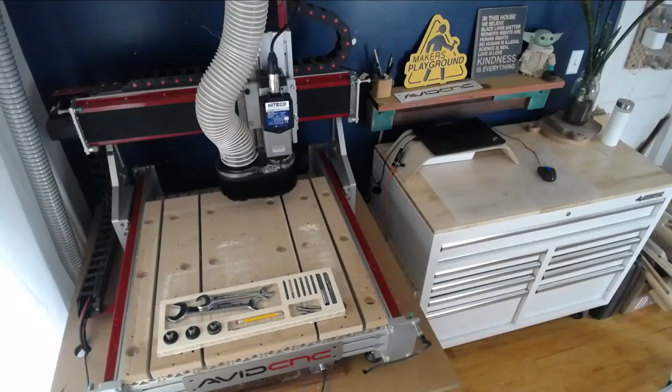Here is the tool tray. I had some scrap bamboo plywood. It's super simple, just 2D pockets. I can put my collets, my wrenches, different router bit selections. I just made a simple tray here for my V-bits, X-Acto pencil.

One little neat feature about the sections that hold the router bits is I made a secondary smaller pocket towards the front, and when you press it down, it lifts up. So it's much easier to pick up than a previous design I had. And I stole that idea from Alex Chappelle, I believe. He's a really amazing designer and content creator, so you should check out his channel as well.

So here is this tray. Here's another tray I've been just kind of using just because it was around. I made a bunch of these out of scrap years ago. This was just like leftover mahogany from, I don't know, another project, which you can see is just full of random screws and blades and Allen keys and router bits.

And there's a nice section that could hold my touch plate, which I didn't include in this particular design. But you can customize it to fit whatever your needs are. We did another project a few years ago that was a tool tray that had handles, which I think is useful, but in this, not as necessary. I think keeping it simple is better, especially for our first project. So this is what we're making. Okay.

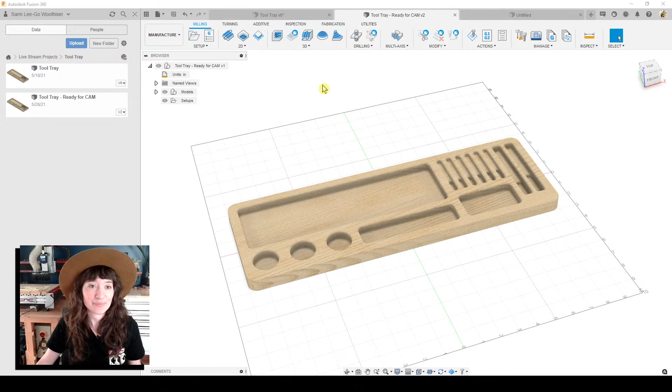So here is what the design looks like. Here is what the design in the CAM workspace looks like after I've programmed the toolpaths. So let's just go ahead and start with a blank design. So I have a design that hasn't even been saved yet. You can click on this plus button here to create a new design. And the first thing you'll do is go ahead and save your design.

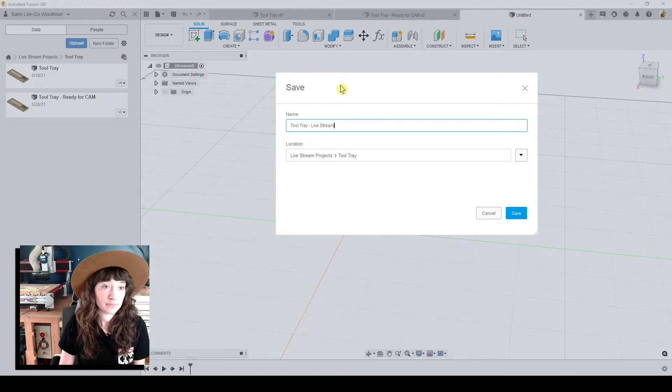We'll do File, Save. And Fusion is cloud-based, but you do have to save it at least once, and try to save periodically so that it's definitely backed up and you are ensuring that your files are saved properly. So let's call this Tool Tray Livestream Example, right? And we'll save that. So now I have a new design here to work with.

And Fusion 360 is a sketch-driven design software. So any changes I make in my sketches will alter and change the dimensions and shape and form of my 3D model. So the first thing we're going to do is create a sketch. So I'll go up here to my Create a Sketch icon.

If you hover over a button, it'll pop up with this gray box with pictures and explanations. You can always Control plus slash for more help, and if you happen to be a subscriber to Fusion, I believe there's the in-chat feature as well from the support team.

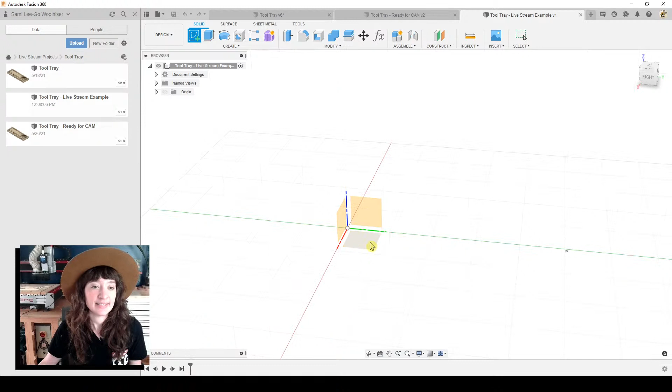So I can select any of these planes to place my sketch. So this is the YZ, this is the XZ, and then the XY. So that's what I'll select here. And we'll close the data panel on the left, just so we can kind of focus in on our design. And I'll just move my camera here so you can see my timeline a little bit better here, okay?

Awesome. So we have opened a new sketch, and up here we have our vector that we can use to create those drawings. It's just like any other 2D drawing program. So you can click line, rectangle, center diameter circle. Splines are really lovely too. I've added a few up here that I like to access fairly often. So mirror, I like to use fairly often.

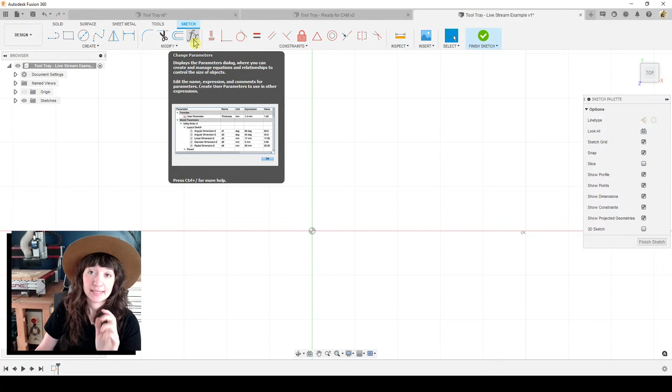I've also added change parameters, which is kind of more of a deep dive to use later on if you really get into it. But we're just going to focus on just entering in the dimensions that we know. So we'll do create, rectangle, and I'll do center rectangle.

So one really great tip I learned from Karenna Harper, she works on the Fusion 360 support team and is just an incredible designer. One habit I used to have when I would model using different programs, I would always model over here in this kind of positive workspace in terms of the Cartesian coordinates. But one tip she would say is to model from the center out. So utilize all of this space. So I'll model from the center outward.

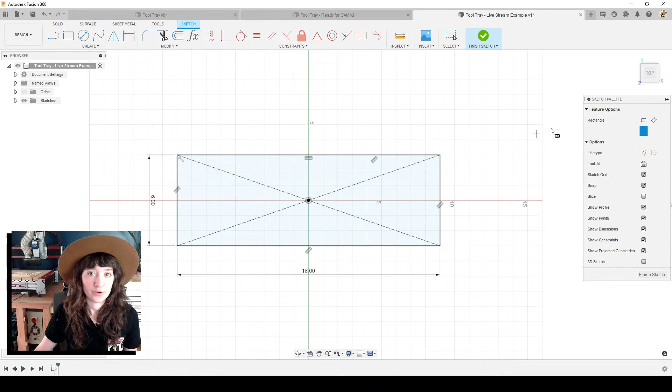And here you can see I can go ahead and click and place my rectangle, or I can go ahead and type in the dimensions. So I'll make this 6 inches and then tab to my other dimension and type in 18, and then click to confirm. If I go up to select, it'll take me out of my rectangle creation mode, and I can double click on the dimensions to change those.

If I had not defined a dimension here, if I delete this, if I click the letter D as my hotkey, select an edge and pull it out, I can change this dimension. So I can type in 7, or I can type in 6 and change it back. Okay, great. So we have a rectangle. Super. I'm going to click Finish Sketch. So now here is my design that I'm working with.

Now I want to extrude this shape because I have the boundary of what I want to work with. And then I will go to Create, Extrude. There's also this quick key right here, or if you just hit E on your keyboard, that also brings you to Extrude. So there's a couple different ways we can tell the program how far we'd like it to go.

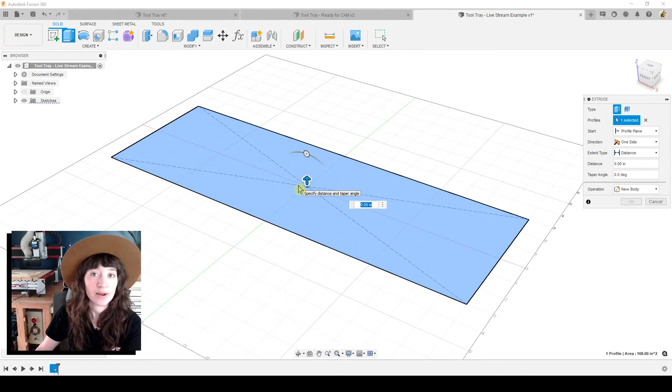First, you can just pull this arrow up and down, and it'll just snap to your grid. You can type here, I would like this to be 1 inch, or in the window on the right, we can type in 0.75 inches if that's the material thickness that you're working with. You can also add tapers. You can tell it, do I want to pull in multiple directions or just one side? We'll say one side for now because we're just cutting one piece of plywood here.

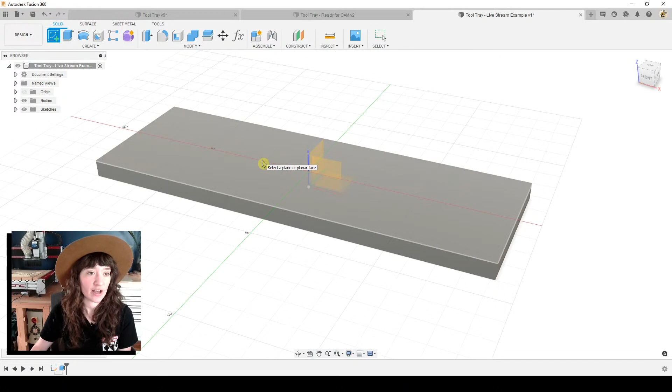So we'll say okay. Great, so now I have the form of the tray, the final shape of the tray. So now I want to create another sketch. We'll go to Create, Sketch, and then we'll select the top of our block. So I don't have to only select the origin planes that were provided. I can now select the surface of our material as well. So now I'm drawing on the top of our material.

Okay, here I will now go ahead and just start drawing a few more rectangles and shapes that I'd like to recess and pocket for my tools. So this would be an ideal time to take your wrenches out and your calipers and just figure out exactly how large you want all of your pockets and dimensions to be.

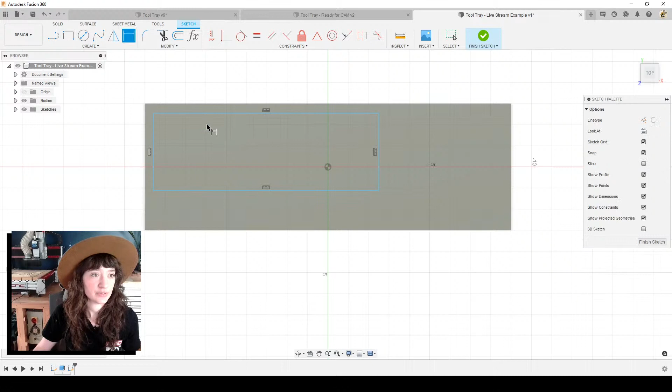So I will go ahead and click and drag this box, and we'll just make a couple of estimates here. I'll do D for dimension. One thing I do know I want is a nice border around the whole edge of my tray. So if I click D, let me redo that again to show you.

If I hit D, the hotkey, and select the top edge of my rectangle and then the top edge of my tray, come over here, I now can set the distance between those two lines. So I will type in 1/2 inch, and I'll repeat that for the edge as well, the left side. Great, so now I have my dimensions for the pocket for the wrenches set.

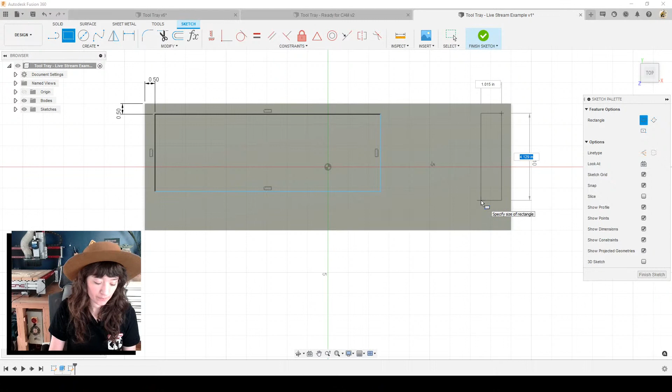Now I want to create a couple for, say, my 1/2 inch router bits. So my router bits, let's see, these ones are 4.5 inches, so I like to make the pockets a little bit taller than that. So when there is the radius of the router bit making the pocket, the flat edge corner of the router bit won't be limited by the radius of the pocket made by the router bit.

And I'll show you what I mean by that in a minute, but we'll just make them a little bit taller so they can nest well, but not so that they roll around or anything like that. So we'll do 4.75 inches. Tab to do the other dimension. And we'll do 0.55, just so it's a little bit wider than we need. You can keep repeating this process and typing in the dimensions if you'd like to do it this way.

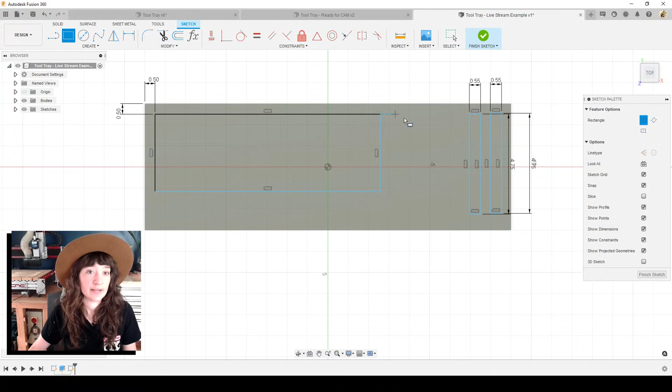You can also create a rectangle here. Let's say this is for the 1/4 inch bit, and we'll call this 2.75 inches tall by 0.25. We'll make this 2.7 inches, or make this 0.3 inches wide, just so it has a little bit extra room. So we have a few rectangles drawn here, pockets, but it's a little bit cumbersome to keep drawing a bunch of them in a row. So let's create a pattern.

So I'll go to Create and go down to Rectangular Pattern. And now it's prompting me to do a few different steps here. So one great way to work in Fusion, when you're given a pop-up and you're still learning the terms, is if you hover over something, it'll explain to you the different parts of what it means. First we'll select our objects. So I just want to select the edges of this rectangle here.

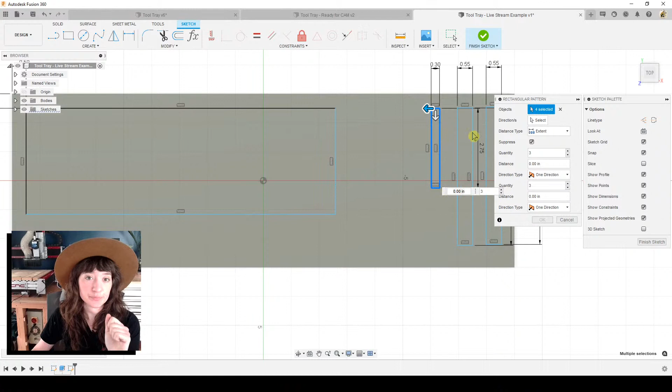And then the direction, it's wondering which direction do I want to pattern this shape in. So I can pull the arrows, and I think that's the simplest way to do this. Here it's giving me some opportunities to enter in those dimensions and the quantity. It asks how many do I want? I'll do, let's say 6 here. And I can just continue to use the arrow to determine the spacing. I can also type it in there as well.

You can pull in multiple directions if you like, but let's just do one direction and click OK. So now I have my set of the 1/4 inch bits, and I have my 1/2 inch bits as well. We can set these dimensions so those are even with our border. So you can see how this is a fairly straightforward way of drawing in Fusion. And then we'll make the spacing between those two bits. I see.

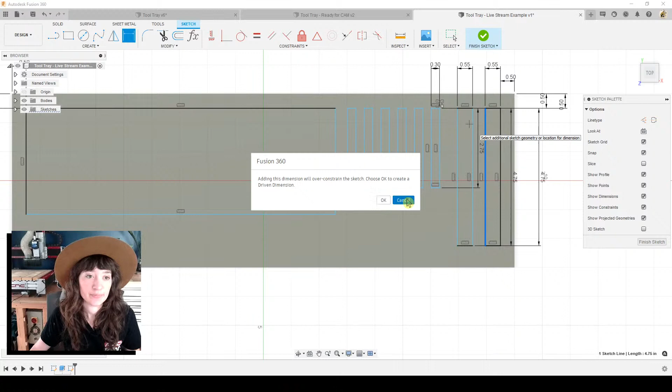Great. So you can kind of space those out however you prefer to do that.

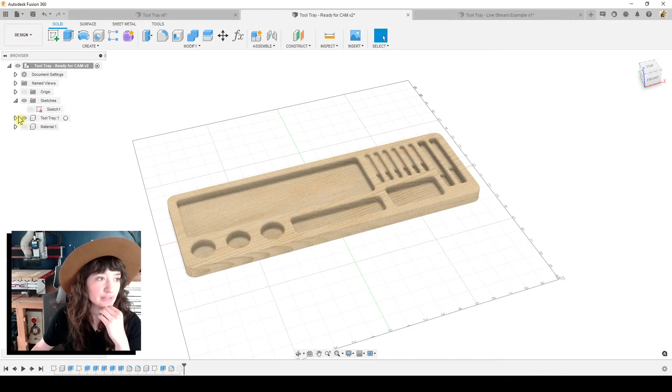So if I go down to Design, Sketches. Oh, that was the original sketch for the surface. And here I can check out all of the dimensions I created for the one that was cut. This was 1.375. So that fit perfectly for the collet; this is the ER20 collet and nut combination. So I'll go ahead and set this dimension.

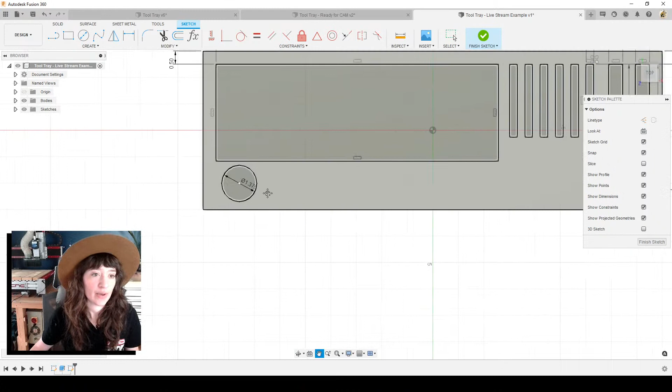I wanted to show you how to do a very simple formula in setting dimensions in Fusion. So when I am going to set the dimension here between the edge and the edge of this circle, it actually kind of just snaps to the center of the circle. So I can't necessarily type in 0.5 inches because it's not the distance between the edge of the tray and the edge of the circle. It's the distance between the edge of the tray and the center of the circle. So here we're given an opportunity to type in that dimension.

What I would do here is determine what is the radius of the circle. 1.375 inches is the diameter. That's not exactly as easy as if it was 1 inch. So doing it in your head isn't something you necessarily want to have to do. So we'll type in parentheses 1.375 inches /2. So it's divided by 2, right? So that's the radius, plus 0.5 inches. So you can type in these formulas and enter in these parameters. I'm actually going to copy that, Control C, and then click Enter.

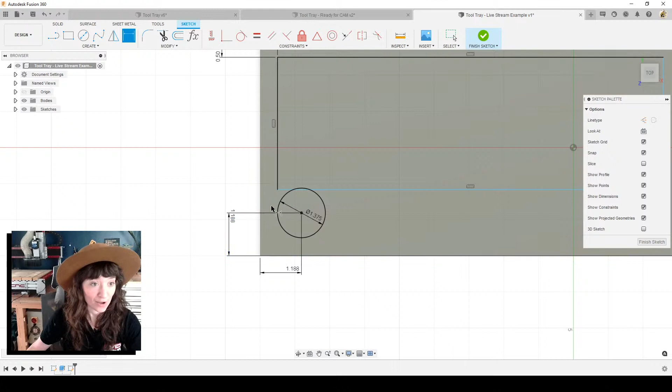And now you can see that this circle edge is pretty much parallel tangent with this edge of the pocket there. So I'm going to do the same thing between the bottom edge and the center of the circle, and I'll Control Paste and Enter. And so now you can see it's offset about 1/2 inch from the edge there.

Now our pocket above is a little bit too tall, so I'll just click on the edge there, pull the dimension out, and change that to something that fits a little bit nicer. I can make it 3 inches or 3.125 maybe. So something that just nests in really well. It can be aesthetic or it can be really practical depending on what you need.

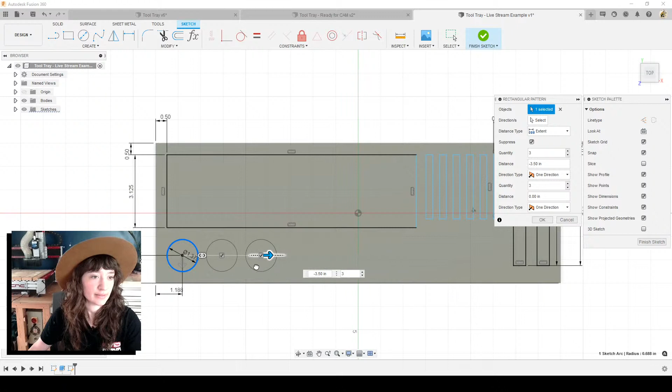We want to make a few more of these collet holders. So we'll go ahead and create a pattern again. So I'll go to Create Rectangular Pattern and just place a few along the way here. Let's see. I feel like that looks nice. We'll say OK. So the nice thing is that this doesn't have to be super precise in the spacing between. You just want to make sure that everything is going to fit in those shapes that you're making.

We will reset this drawing to look from the top view. It's a little bit easier to draw that way. And I will just create a few more shapes here. You can make a really long one like this maybe for pencils, or you can make separated individual trays. And we'll just go ahead and set these dimensions as well. It's not letting me snap there. Okay. There we go. 1/2 inch, right?

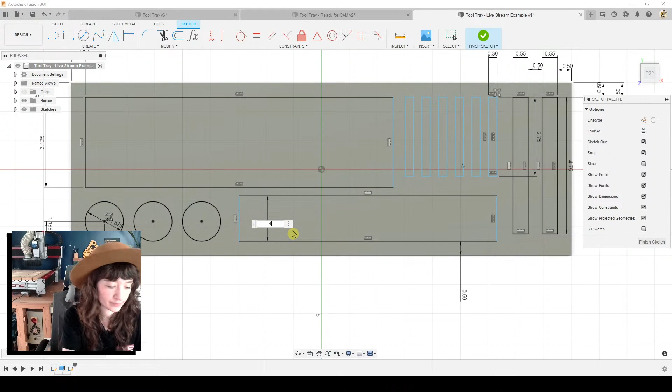Okay, I feel like this looks pretty satisfactory to me in general for the overall layout. You can obviously change and make this exactly how you like. So now there's one other thing I'd like to do, and that is the feature in which you can press down on the bottom of the router bit shank, so that the top of it will pop up so you can easily lift it up and out of the tool tray.

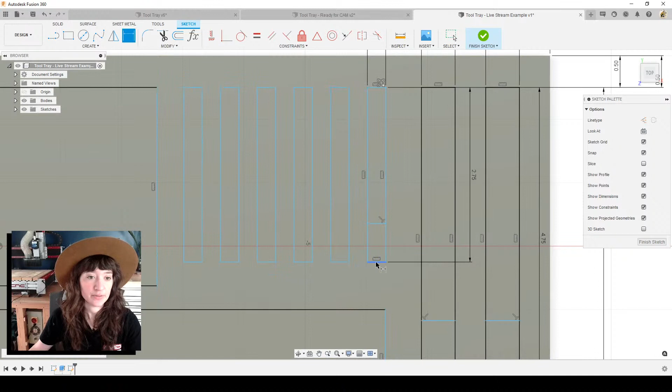So I'm just going to create a few lines here. Maybe I'll do it on this one like this. So I just drew a line from one side to the other, and I'll do this on the 1/2 inch bit as well. And I want to set a dimension from the bottom of this rectangle to the bottom of this line. Let's say 0.75 inches. Okay. Maybe these ones a little bit taller, 1 inch. Maybe 1.5.

I found that you didn't want them to be too tall, otherwise they would kind of teeter into that area, but it was really helpful if they were just about 1/4 to 1/3 of the overall shank length, in order to optimally let them lift up.

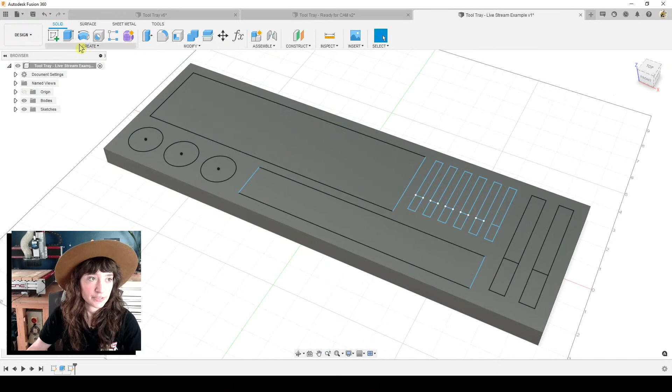So as you can see, we just have our sketch that's sitting right on top of our extruded base of our form here. So we'll go to Extrude again, and all I have to do is select these sections in our design and either pull up or push down to cut into our shape. You want to make sure you're not going to cut too far down into your part, making sure that there's a little bit of thickness on the bottom of the tray. I'd say for these sections, 1/2 inch seems good to me.

We can look over here and check out what it's prompting us to do. We'll extrude on one side. The extent type is the distance. So we just typed in the distance here, which is -1/2 inch. You can add a taper angle to it if you like. I'm just going to keep it as a straight wall. And you can create a cut, or you can join. Say you're making a new shape, but you want it to fuse to a shape that exists already, that would be what you would use that for.

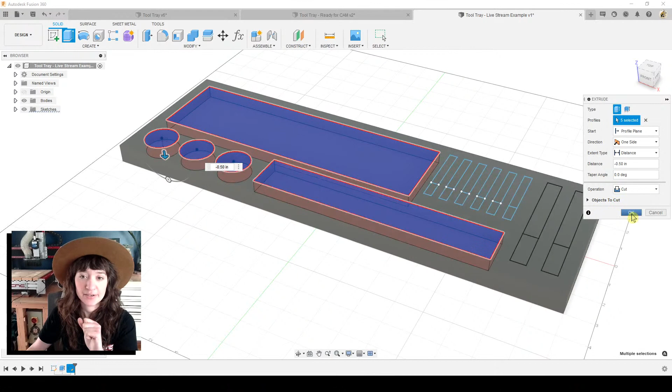You can create a new body or a new component. There are quite a few differences between bodies and components, but for now bodies are just fine. So if you're new to Fusion, learning about the differences between components and bodies is something to do a little bit of a deep dive into. Okay, we'll just do a cut operation here and say okay. So now you can see we have our little recessed areas.

One thing to note is that these corners will be radiused, and as I was mentioning before, because of the router bit cutting from the top, the radius of the router bit is obviously going to leave that radius in the corner as well. It hides the sketch after that first extrude, so we'll turn the sketch visibility back on, and I'll go ahead and extrude these pockets as well. Hit E for extrude, and I'll just select these shapes.

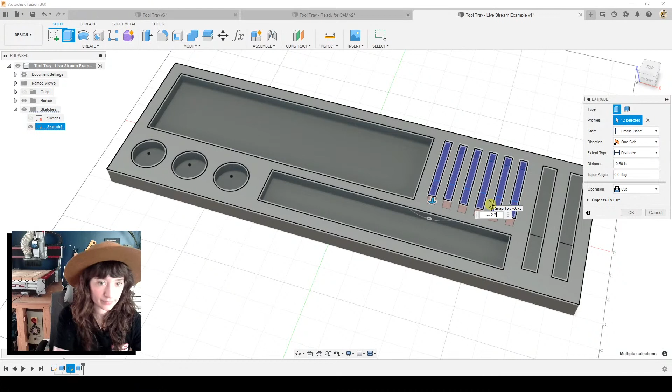So for the 1/4 inch bit, let's make that minus 0.2 inches. Oh, there we go, minus 0.2 inches. I have two minus signs there. Okay, minus 0.2 inches. So we're subtracting that shape from our body. We'll click OK. Awesome. So right now it's just a completely flat pocket.

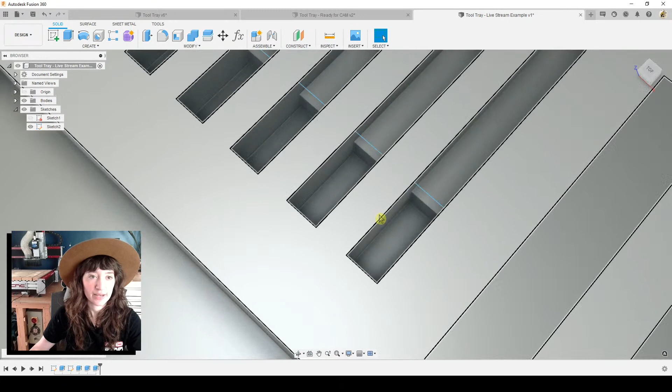So what we'll do is extrude again, but we'll select just the bottom rectangles, and we'll bring this down. Let's say 0.4 is probably fine here. So we'll cut that distance down. And so now you can see it's got a step down there. Let me hide the sketch for a second. So this is where the tool will sit most of the time, but when you press down on the bottom of it, it will come down and touch this surface and be able to kind of pop a wheelie, you know what I mean?

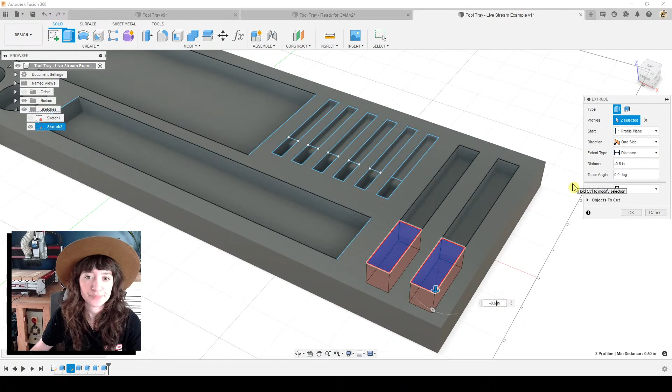Okay, so we'll do the same for the 1/2 inch bit. We'll extrude. Maybe 0.4 inches is good. Say okay. Extrude these two surfaces. Let's do, I don't know, 0.6 would be good, I think. Okay, and say okay. Great, so now our 1/2 inch bits have their little resting area as well.

So you saw that I didn't pocket these all the way down for the full height of the diameter of the bit. You can sit them below the surface of the material, but I don't think it's really necessary. You just don't want them to roll off the tray, and this is plenty to keep them in.

So you can see we have sharp edges here. There's a couple ways you can change this. You can add fillets in the sketch. You can add fillets here in the 3D workspace just by clicking on these edges and adding a fillet.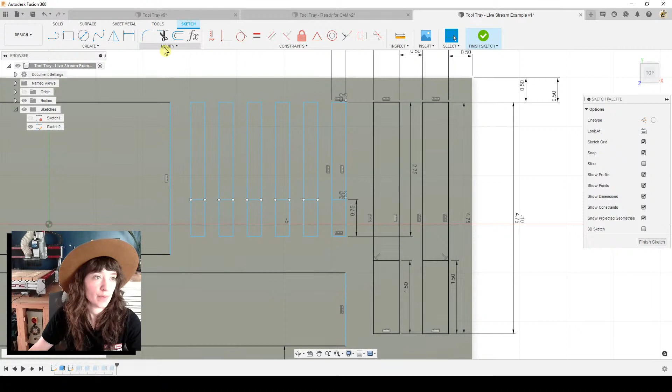So if we were to go look at the sketch and edit that, we'll go to Modify, Add Fillet, and you can click on the corners here, and this will be able to just add a little radius to the corners as well. So you can click on the corners or the two edges that meet to form that corner.

You can type in 0.125, the radius of the bit. And if you click enter, it will change the shape here of that rectangle. If we say finish sketch, if I zoom back in, you can see because I altered the sketch, it altered the model.

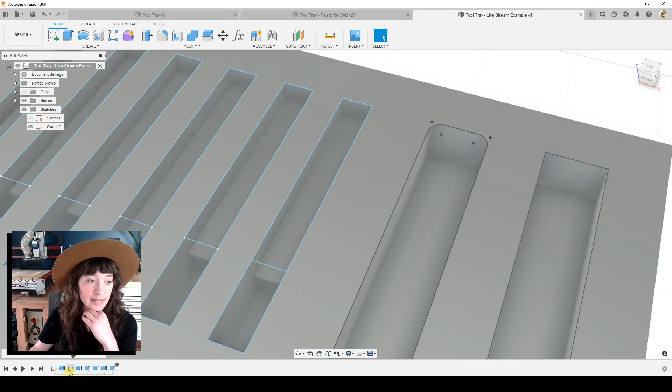If we look down here on the timeline, we can see that the sketch was created prior to these extrusions being made, which was the subtractive element of making the pockets for those router bits. So because that extrusion was made based on that sketch, any changes to the sketch will change the extrusions that we have created as well.

You don't necessarily need to add all of these fillets for it to show up in the CAM, because the limitation of the router bit will automatically kind of show up in your cut anyway. So in my tray, I have rounded corners, even though I didn't necessarily take the time to go and put fillets on all of my corners. Okay.

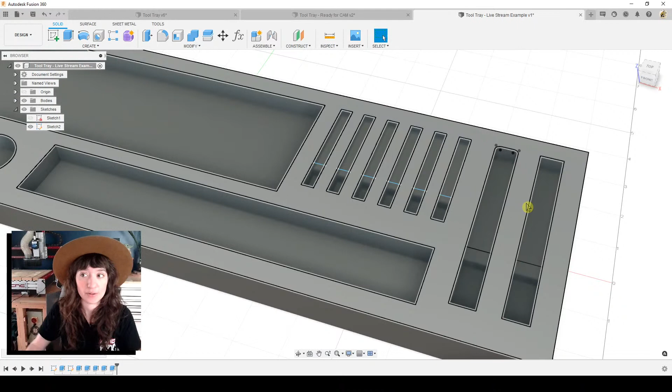Let me just look at these questions really quick. Can you discuss later how to manage tool changes within Fusion? Okay, so manual tool changes really rely on the tool numbering system. We have a video coming out really soon for how to perform manual tool changes in Mach4, and making sure that your tool numbering system is working is really the most important thing for doing manual tool changes.

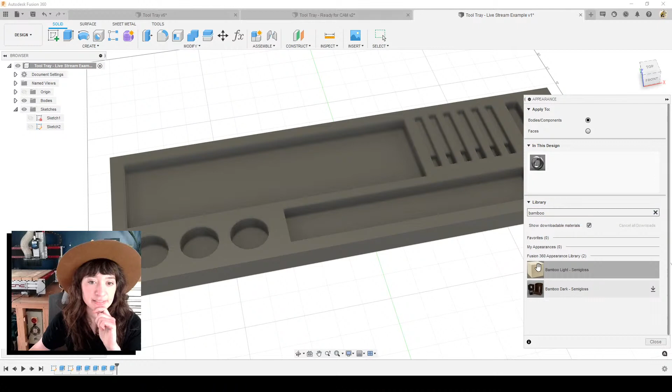Okay, great. So we have our design created, and now we can hide our sketch. At this point, I like to give an appearance. So if you hit A on your keyboard, you'll be able to add a new material to this. Since I'm using bamboo plywood, I can go ahead and click and drag that, or you can add ash or something here. If you double click on it, you can change the colors of it. This is really great if you're making something to show a client.

Okay, super. So here is our tray. And now we're going to jump into the manufacturing workspace. We'll go to design. Here's the render workspace if you want to make a nice render of it. We'll go to manufacturing workspace. And here is where we're going to set up our toolpaths and that sort of thing. We're going to keep this really simple.

I know you're interested in learning how to do the tool changes in Fusion, but we're just going to keep this with one router bit selection for this project, just because it's that simple. I only really need a 1/4 inch tool. So here is setups. We need to create one setup for our project.

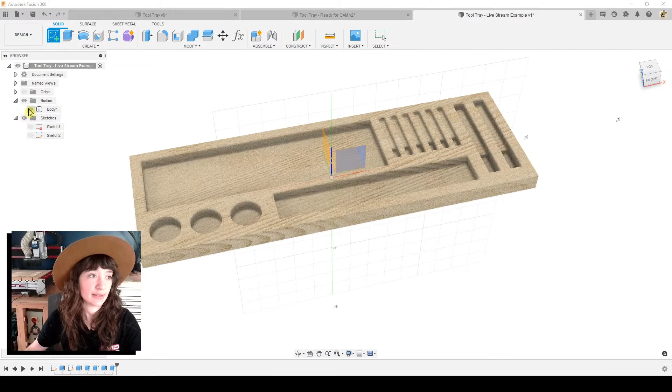One thing I really like to do, and this is a personal preference, it really depends on the kind of project you're doing. I'm actually going to take us back to the design workspace really quick. I really like to model my material and just have that be a shape I can reference when making my manufacturing setup. So we'll go to create a sketch again, and we're going to hide the tool tray for a second, and I want to select the same origin plane, the XY plane.

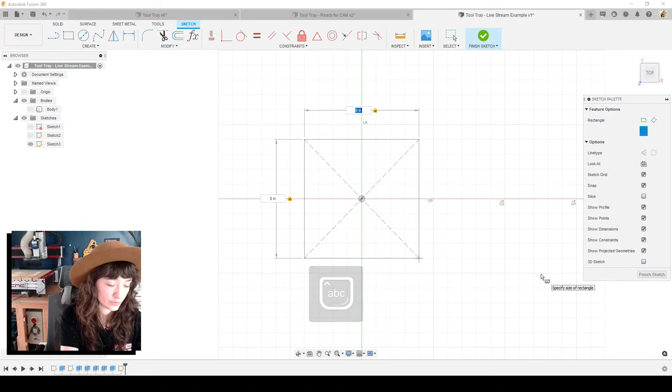I'll create a rectangle and do the center point rectangle again. At this point, you want to take a measuring tape and measure your material. I believe my material was somewhere around 8 inches tall by 22 inches wide. Okay, so this is about the size of my material.

We'll say finish sketch. And another really good habit I would hope you can pick up is naming all of your layers and sketches. It's a really great habit, especially when things get really layered. So I'll go ahead and extrude this shape and make it the same thickness as my material, so 0.75 inches, and click OK. If I turn the shape of my model on, I can't really see it too well.

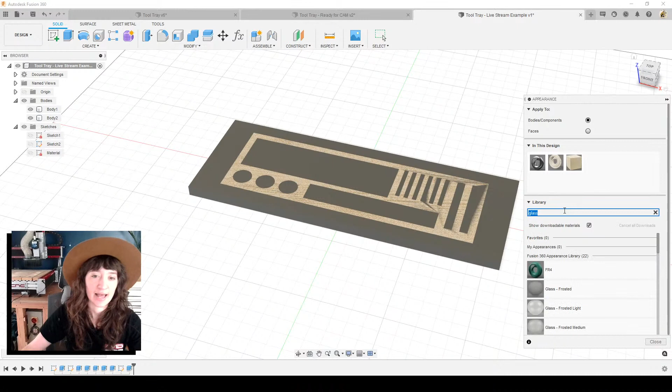So one thing I like to do is to apply some sort of a transparent appearance to the material. I usually use glass for some reason because it's a nice color. And I'll click and drag that onto my material. So now I can see where the tray is within that material, kind of like Michelangelo's sculpture inside there. I just have to know exactly where it is and how to reveal it.

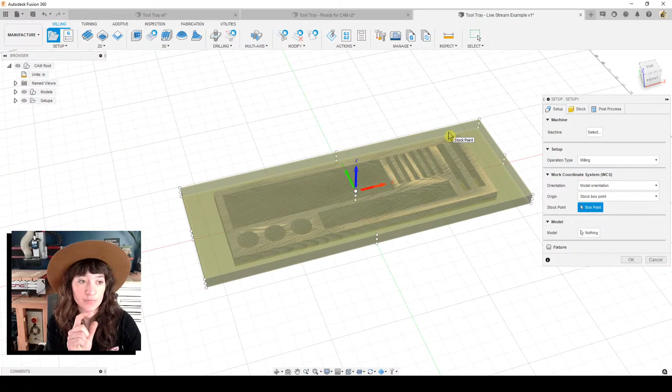So we'll go back to the manufacturing workspace. We'll go up to Setup here and New Setup. So this is where we're going to initially start out with telling Fusion exactly what the model is that we're focusing on cutting, and then what model we're going to reference as

our stock. So before I even get into this, I like to go to the Stock tab, and it says relative size box. So it tries to make a shape that's relatively the same size as your model. But I like to go down to From a Solid. And in my models, I will select the body 2, which is my material I've modeled. So now that has been selected as being my stock material.

We'll go back to Setup. And at this point, I will hide the model of my material because it's now being referenced, but I don't need it to be in the way for me to select other things.

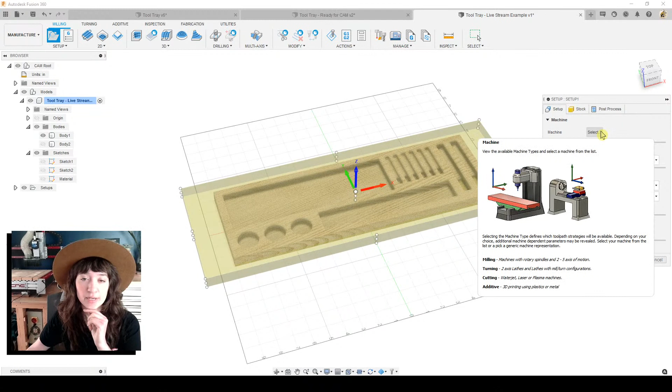So for machine, we can skip that for now. This is kind of becoming a newer feature in Fusion, and hopefully we'll be able to be a part of that really soon and have our machine models available, you know, kind of for preview and that sort of thing when you're running your simulations. We're going to say our operation type is milling.

And this is our work coordinate system. So this is a little bit different than in VCarve, it's just called the work coordinate system. It's your 0 essentially. So where is our G54 offset or whatever you're using, if you're using G55, that sort of thing. It usually defaults here to the center and the top of your shape.

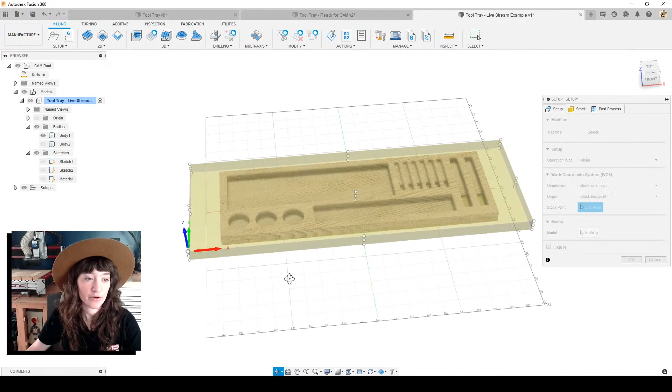I like to select the box point, and I'm going to select the front left and top surface of my material. You can always select the bottom corner, which is the surface of the spoil board. But I think this is the easiest place to zero, especially when you're starting out. I don't think there's a reason to not select that other than if you don't really want to cut into your spoil board or something like that.

This is if you already know the thickness of your material. This is just the best way to not make as many mistakes, because if you accidentally zero to your spoil board, it will. Okay, so let me back up here for a second. So there's a lot of different ways and reasons you might pick a different zeroing position. I think that this is the easiest when you're starting out. If you just keep that as a standard to start out and then make changes, it works. You're a lot less likely to make those mistakes.

But essentially, no matter what you pick, make sure that you're double checking exactly what you set up in your CAM program as you are setting up on the machine. And that's the most important thing, is that those two things align. So we have our 0 selected, and then we can go look at the post processor here. This is just the name and the number. So we're just going to leave everything simple like this and click OK. You can change the name of the program though if you like.

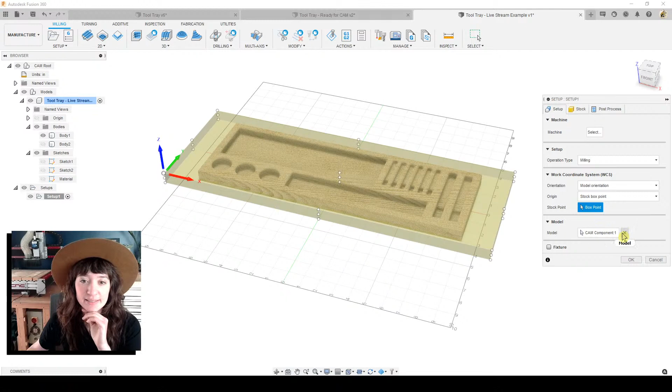Oh, I didn't select my model. So let me open that setup again. So if you go back to setup here, I skipped select the model. And we'll select that shape there because it defaulted back to the stock material, which I had selected. So we have the body selected. Now click OK. Great. So now we can actually machine our component that we've made, or our body.

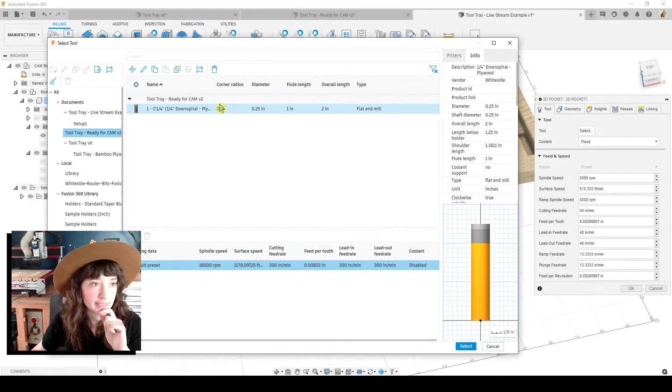Super. So we're just going to make 2 simple toolpaths, and that's going to be a 2D pocket and a 2D contour. So I'll go to 2D pocket, and this is going to bring up our options over here. Sometimes it opens like this, but if you pull it out this way, you can see the names of each of these tabs. So the first thing we'll do is select our tool. And I have a router bit here selected already that I've made. It's a 1/4 inch down spiral bit, and I already have all these settings applied. So once I select that, it will change all the settings here in the feeds and speeds options.

18,000 RPM is our spindle speed. I have a lead in, lead out, and cutting feed rate of about 300 inches per minute. The ramp and the plunge is slowed down there a little bit.

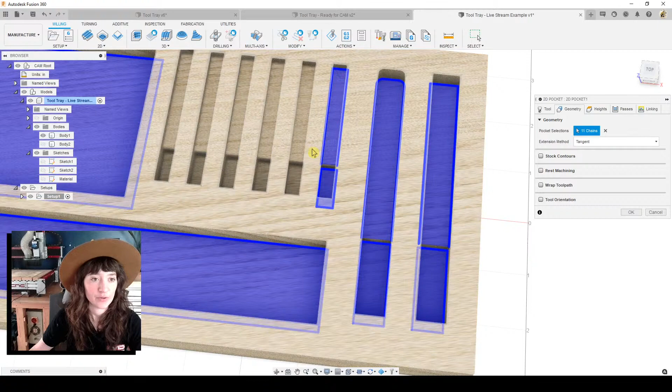And we'll go to our geometry. And here we want to select the surfaces that we'd like to cut. So I will go ahead and just select the surfaces. You can select the edges here, but I just prefer to select the faces. I feel like that is the simplest way to select those shapes. If you hover over it, you can see which surface you are about to select.

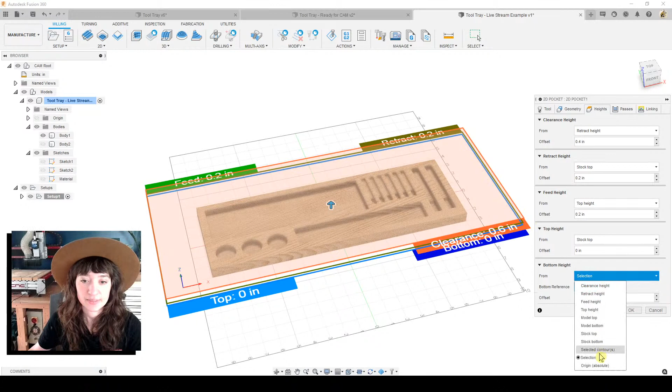Okay. So you can see all these are on different heights, and that's okay. So if we go to heights now, this is all the different heights that the router bit will lift up to and move down to throughout the operation. So most of these we would like to leave as it is, except for the bottom height. We want to make sure it says selected contours, that we have for the cutting operation. That way it will cut to each surface that is selected.

The top height is the stock top. And if you hover over these, it'll give you all the definitions and the different heights, the settings. If we go to passes here, I want to make sure to turn on multiple depths. That way it'll do multiple step downs.

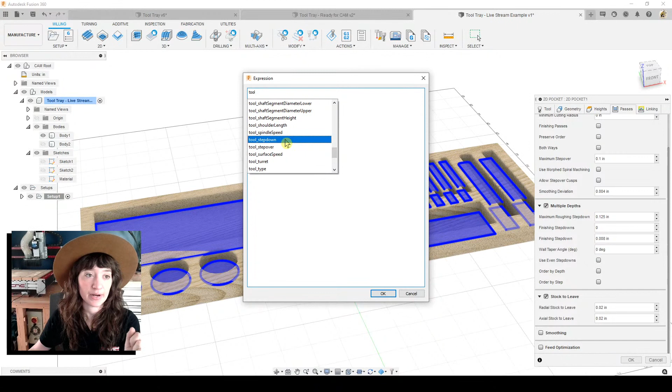If we go into this section right here, you can right click and you can either type in the dimension that you'd like the step down to be, or you can say edit expression. Here I've set it to be tool step down. So if I just type tool, it will give me some options that it can reference. So the step down I selected is going to reference the step down that we have entered in our tool library. So I'll just select that and say OK.

I'm going to turn off stock to leave. I don't necessarily need that to be on there. Here we can enter in the finishing step down if you want it to be a super clean bottom surface layer, or if you want it to be even step downs, but we're just going to leave it the way it is just to keep it simple. And then we'll click OK. And here now it will generate our toolpath.

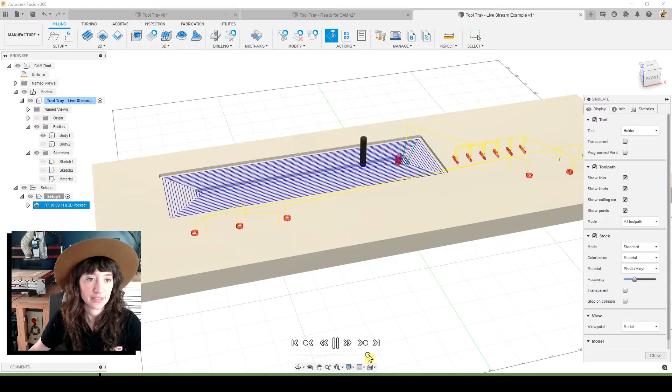So if we go up to simulate, here we can simulate our toolpath cutting. And here's the speed at which you can increase the preview. Super, so that looks like a nice, simple operation to me. And now let's go ahead and program our contour. We'll go to 2D contour. You can also select it here. That's a very common one, so it's already up in the toolbar. And you can see it's already automatically defaulted to the tool that we had selected in the last toolpath.

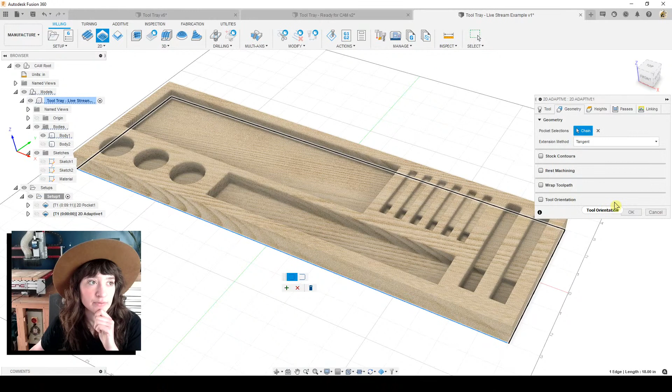So I'll go to geometry and select the bottom vector here for my tray, because I just would like to cut the tray out of my material. Okay, so this is 2D adaptive. Okay, so I clicked the wrong icon. I wanted 2D contour. I saw that the tabs option was not available. I was accidentally doing adaptive. So let's do 2D contour. The tool has been selected. We'll go to geometry and select the correct contour. There we go. And so now you can see that tabs is available.

When you're placing tabs, it really depends on the material that you're using. I like to be fairly conservative, but I don't want to spend too much time cleaning up tabs. So we'll make them triangular, because if you're cutting out of a hardwood or really good quality plywood, you don't necessarily need to use really thick rectangular tabs, because the plywood will be pretty strong. I like to make them about 0.3 inches if it's a good quality wood. If it's going to be a shop ply, you might have more voids in your material, which means that it's more likely that your tab is not going to be as strong. It might break out while you're cutting it.

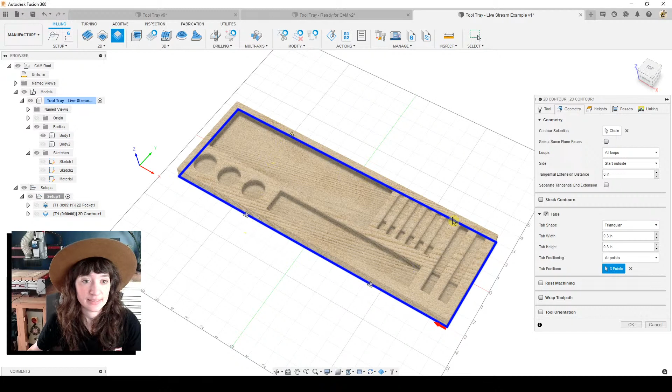So we'll go to at points instead of by distance, and then here I can just place my tabs like this. Okay, and so then the heights, we're going to leave the same. It's going to cut through to the selected contour. You could also, for this one, because you'd like to cut it all the way through, say model bottom, so you can cut all the way through the material. The different passes, I'd like this to be multiple depths, and say okay. And so now we can watch this in the simulation.

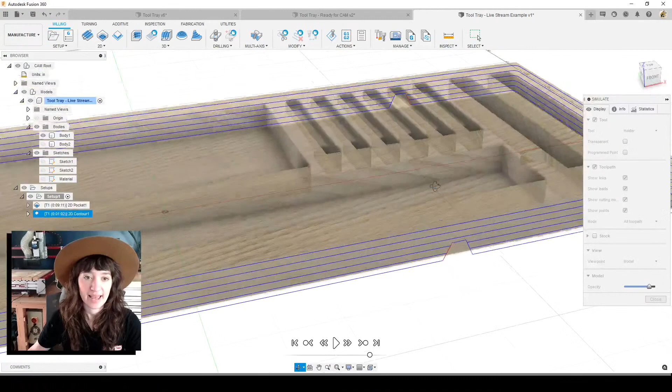And so if we hover over it, we can zoom in and see how the toolpath lifts up for the tab there. Super. So this is how you create some very simple toolpaths in Fusion. Next, I'd go on to post-processing.

So if we go to Actions and Post-Process, here is where you save out your toolpath. You can change the name or number of your program. Here is the location of the output folder. So this is where you're going to be saving your G code. So let's go ahead and save this code together. So this is the post I'm referring to.

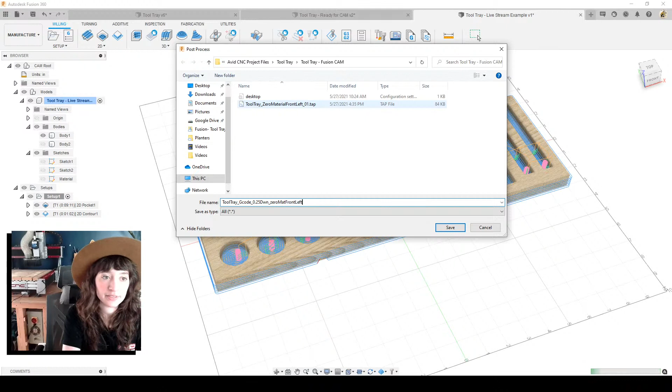So I can also rename it here, tool tray G code. And I also like to put little notes in here, 0.25 down spiral, 0 material, front left. So that's just a nice reminder for me, or if there's a certain file naming convention that works for you, please let us know, share what your methods are. And so then you click Save.

So awesome. This is kind of the end of the Fusion part of the tutorial. We're going to jump back into the past and do the walkthrough for how to set up the project and cut it on your CNC machine. And I will be back at the end to answer some more of your questions, or I can answer them in the chat as well.

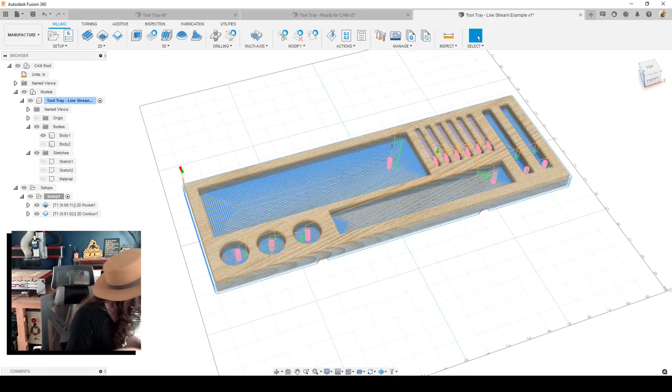Oh, I have a question here. Placing the 0 on the top of the material is implying your stock must be perfectly flat. I'm guessing a surface is needed or not. Right, so as Brian was mentioning, you can include a surfacing toolpath. If you have a rough surface, I actually have a really good example of this. I have way too many random scraps of material around. Actually, this one's rough on both sides, but let me switch.

So here I have a really rough piece of material. In this case, in order to be really repeatable, zeroing to the bed makes way more sense. I think that just starting out, when you're setting up your 0 on the machine, if you are just defaulting to zeroing to the surface, then if you accidentally zeroed to the spoil board or the bottom of the model in your program, it'll do air passes, which is the lesser of the things that could go wrong there. But you're right, it depends on what distance you value.

And we did a zeroing live stream about this, and I talk about the theories of this, which I could talk about for literally hours. So let's circle back to that, and it's a really good point. We're going to jump into the past and do that walkthrough, and I'll be back to answer some more questions.

Okay. Hi everyone, and welcome to the next portion, which is we're going to set up our material on the CNC machine, open up Mach4, get our machine set up, and run our program. So let's go ahead and jump into it. First thing I'm going to do is get my material here. I have the bamboo plywood all cut, ready to go. It's a little bit oversized from my final part, which is great because I have a lot of extra work area.

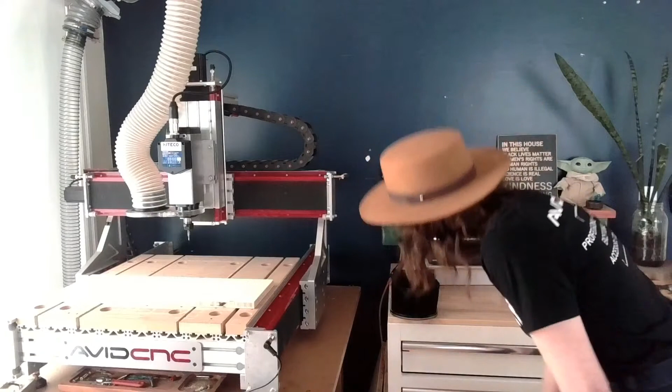So let's go ahead and find our composite nail gun. So this is what I am using today. If I pull this trigger back here, I can get my composite nails here. So with the Omer Nail Gun, I will just insert the nails. Well, first I like to figure out what size is best for the thickness of the material I'm using. So I'll hold it up against here, and if there's about a 1/2 inch above the height, that's about how deep I'd like it to go into my spoil board. So I'll go ahead and insert the nails, release the trigger.

Okay, so now is about the time where we'll put on our safety glasses. And we'll get our air hose here. All right, I have my Omer Nail Gun now connected to the air, and I'll just go ahead and put 4 spots here. Need a little bit more air in my air compressor, so let's go ahead and turn that on. So I went ahead and put in 4 composite nails, just 1 in each corner. I know that I am not cutting that close to the edge. Normally that also wouldn't matter.

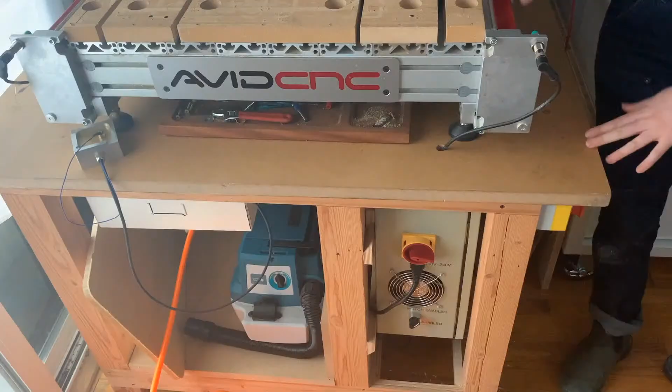Okay, so now I'm going to go ahead and turn on the controller for my CNC machine. So now you can probably hear the fan come on. I also like to put my hand near the fan if I'm in an especially loud shop, so I can tell whether or not the controller has turned on. You know, sometimes something comes unplugged, and that's a really easy way to tell if your controller is on in a loud shop.

So now that I have my controller turned on, I want to ensure that the controller is connected to my computer. Here I have the Ethernet cable plugged into a USB adapter into my control computer. So the controller is on. Now I can open up Mach4 on my controller computer. And we'll let that open up.

So if you haven't already updated Mach4 recently, I recommend going to do that. I've linked a link to that below. Keeping Mach4 up to date, check once a quarter or so. It'll be really helpful so you can always get the next features that we add to Mach4. For example, the spindle warm-up program is one of those.

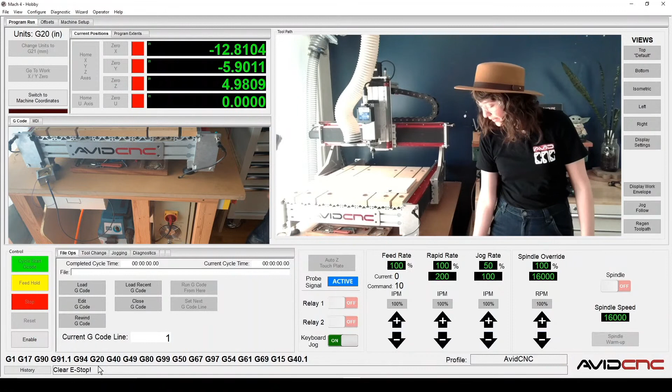Okay, so now that my controller is connected, I'm going to go ahead and click Enable. Oh, down here at the bottom it says eStop is in effect. Clear the eStop condition. So it won't let me enable it because the eStop is accidentally pressed. So you can see my eStop is right down here, which can be kind of nice because it's easy to access, but I'm just going to twist and release that. So now that my eStop is released, I'm going to go ahead and click Enable.

So now that Mach4 is enabled, my CNC machine is on, it's connected. I can use the arrow keys on my keyboard to drive my machine around. Great, so now I'm going to go ahead and move the gantry forward so it's a little bit closer to the front of the machine. I don't want to move it all the way up, but just enough. Okay, great. So now I can home my CNC machine.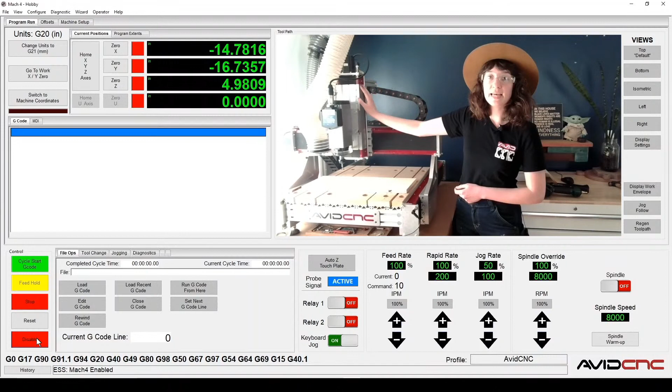So what that means is it's going to find the limits of its machine work envelope using these inductive proximity sensors. So the metal of the gantry will set off the front Y1 and Y2 sensors. There is an X sensor on the other side of the gantry. Here's the X plus, and then here's the Z plus. So this will rise up and detect the Z gantry plate. So we'll go ahead and click Home XYZ.

Awesome. So this is a really important thing to do at the beginning of every time you turn your CNC machine on, because when your machine is turned off, the motors are not enabled, which allows the gantry or the motors to move around and become misaligned. So it's just so the machine can really wake up and kind of find where it is in space. So it will help with your repeatability, and I recommend that being a part of your startup routine.

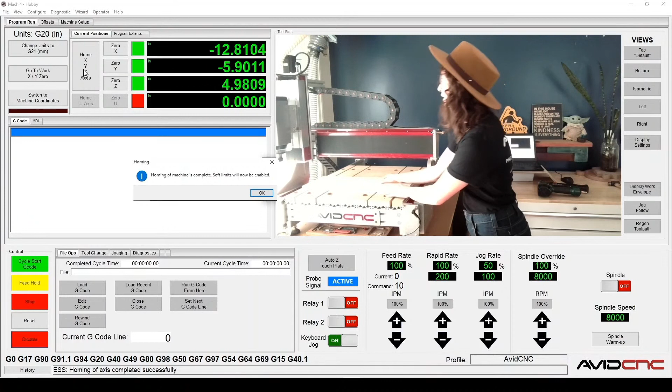Okay, so now we're moving forward. We have our material attached. You can give it a little wiggle test here to make sure it's fully attached. We have homed our CNC machine. Now we can set our 0. So in our program, we want to always double check where our 0 is set for our workpiece offset. Go ahead and click OK on homing the machine.

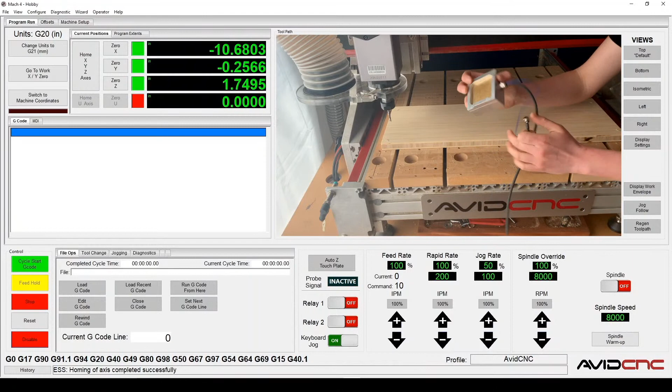Great. So I will just use my arrow keys on my keyboard to jog my spindle over to right about where I want to set my 0. I'll take my touch plate here and I'll use the corner finding edge to place it on the corner of my material. Kind of set up my cable so that it is, there we go, right? So it sits pretty comfortably. Ideally you want to attach the magnet to the bit for best connection, but you can attach the collet, but this will create the circuit.

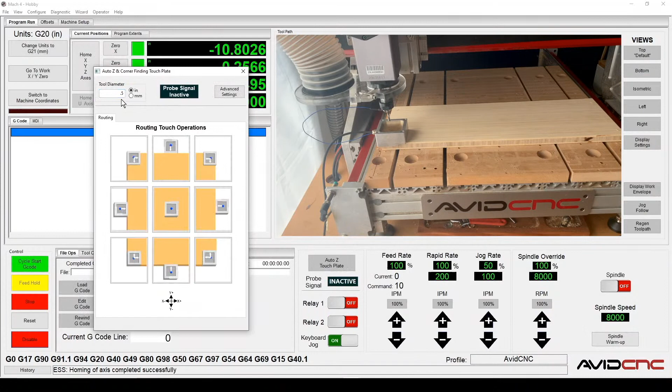So when the bit comes down, it'll touch the brass plate, come up and touch the top edge and then the inside edge here. So we'll go to our Auto Z and corner finding touch plate icon here, and it'll open up this window for us. So the first thing I want to do is to enter in the diameter of my tool, so 0.25 inches. If you're using millimeters, you can use millimeters. This is part of that algorithm, so it knows the exact dimensions of the touch plate.

So when it comes and touches off the edge, it needs to know the diameter, or essentially needs to know the radius, so it can figure out the offset from the center of the spindle. So that's how that works. We have several options here. We're going to use the front left corner probe, and if you hover over it for a little bit, it'll give you a little bit more of that description.

Before we do this, let's just double check that the probe will create that full circuit. So one way I can do that is to lift the touch plate up and touch the bit. So you can see on the screen it probably is turning blue. Yes. So up, down, right? It's connecting, turning on blue, which is a good sign that it's going to be able to complete the circuit.

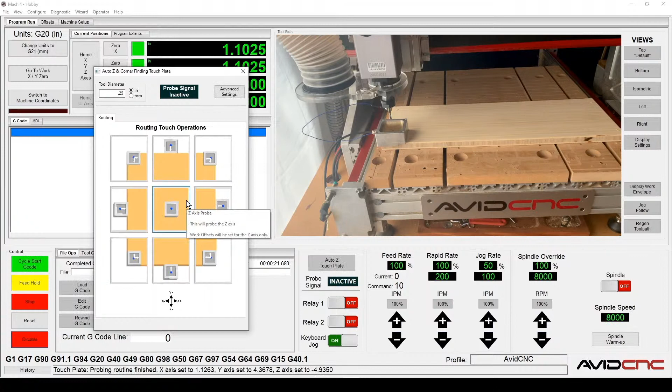So now we'll go do the touch off. So go ahead and click that button and it'll go ahead and automatically move down. Touch the brass plate, lift up. It's going to, in Mach4, request that we rotate the edge of the flute to touch the Y wall. We say OK. And we're going to rotate again to touch the interior X wall and click OK. Great, and now our touch plate probing is complete, so we can remove that. So we have now set our workpiece offset from our machine coordinates.

So now we can load our G-code. I'll close this window and we'll go to, under File Ops on the bottom, we'll click Load G-code. Here's where we can navigate to our G-code. So locate the file where your G-code file is saved, and we'll open up that file. Super, so here you can see we have our code loaded. We have tool 1, which is a diameter of 1/4 inch, which is good. It's a flat end mill. Okay, great, so that's what we have located.

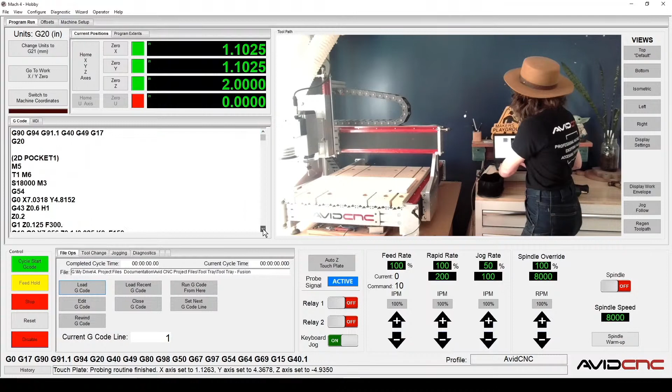And then if you scroll down, you can just see the basic toolpath operations down here. Here is our preview window, which is really nice to look at. If you want to, you can always jog your spindle over, and you can see that the red crosshairs here are showing us where the toolpaths are located in relation to the material. So if we just jog around, that's a good way to make sure that you're going to stay on the material, that you've set up everything correctly.

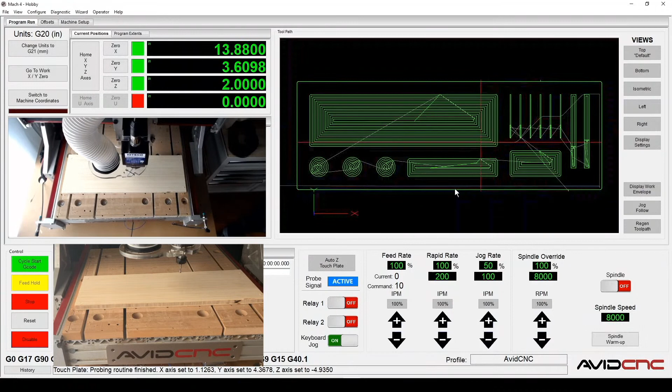Great, I'm really happy with that setup and that location. So I want to remind you to utilize the cycle start checklist every time before you hit cycle start. It is a really great thing to help you catch really simple mistakes. I promise it will save you from more than one heartache. There's a reason why pilots use checklists. It is one of the best safety features and tools that we can use.

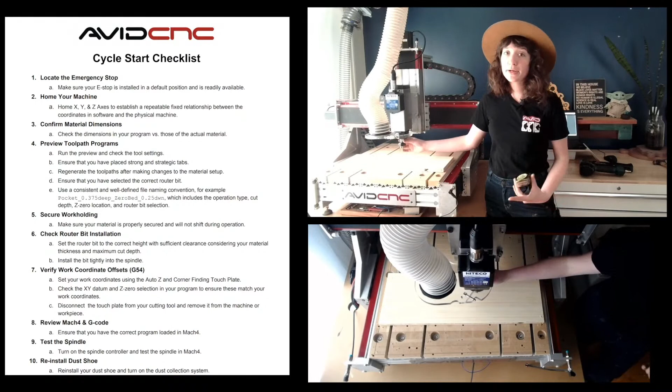Okay, and then we'll go to check router bit installation. I have already installed my router bit, but if you share your machine with other folks or if there's other operators, it's always good to double check that that was tightened down correctly.

So we want to verify our work coordinate offset. Did we make sure that we are zeroing to the material surface, or did in our program we zero to the spoil board surface? So always double, triple check those settings, because that's really going to be, I think, the #1 issue that this checklist can really help you navigate, right?

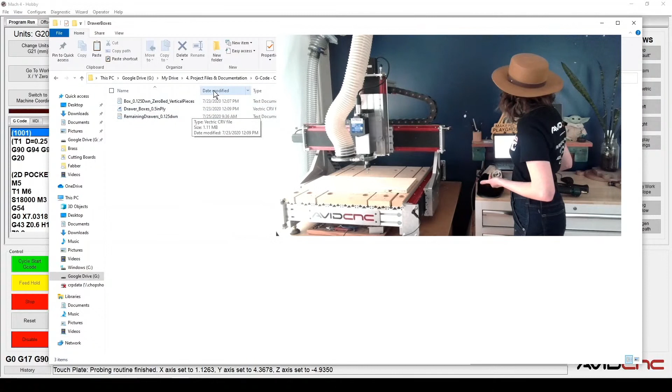Okay, so review Mach4 and G-code. Ensure you have the correct program loaded. Sometimes you save multiple versions doing multiple tests, so it's really easy to accidentally forget to load the right program. One tip here is when you're loading your G-code program, say for these drawer boxes, I have a couple of files here. If I organize by date modified, the most recent version of that file goes to the top. So that's one really great way to make sure you're loading the right program.

Okay, so test the spindle. I would say test the spindle and then also run the spindle warm-up program. Those are going to be two things you want to make sure to do.

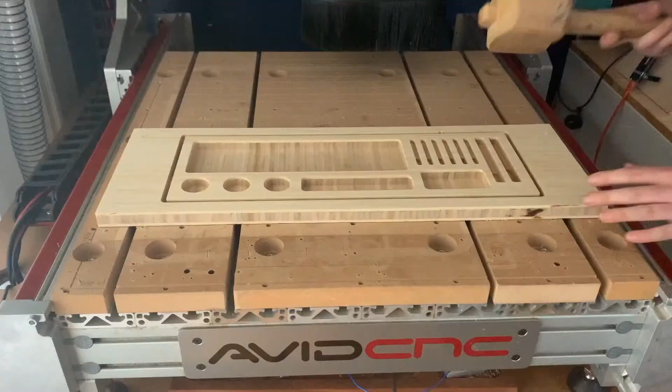So let's go ahead and actually get this off the bed. So one of my favorite ways to do this to remove composite nails is I use a mallet. My friend John Jaffe made this one. And just tap it on the sides and it will just pop right out. I chose to use the triangular tabs, which I find much easier to cut.